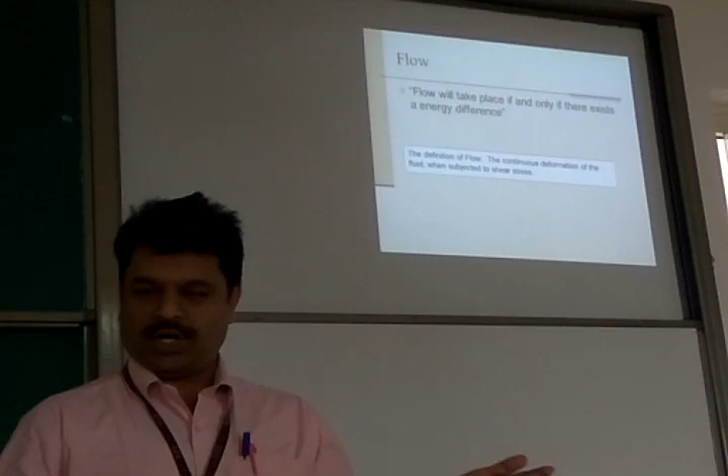Flow is a natural phenomenon. You need not force something to flow. In fact, you cannot. What you can do is create a potential difference, and flow takes place automatically. If there is a pressure difference, fluid flow takes place, whether it is air, gas, or liquid. If there is a temperature difference, heat flow takes place. If there is a voltage difference, that's a potential difference, current flow takes place. So flow is a natural phenomenon, and you don't have to do anything.

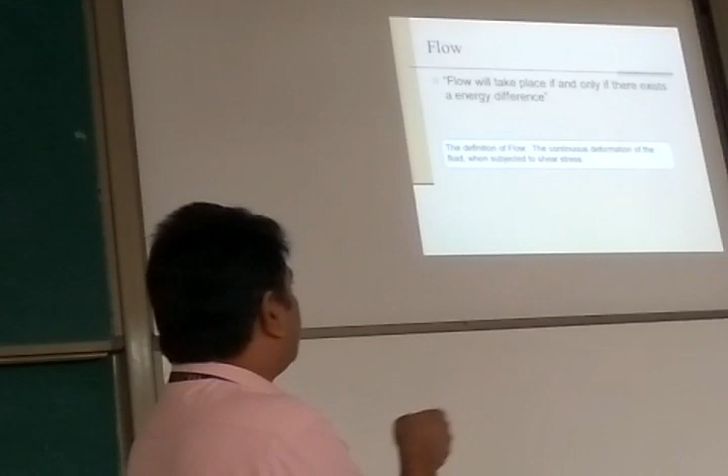From a measurement point of view, the definition of flow is: if there exists an energy difference or potential difference, flow takes place. The formal definition of flow is the continuous deformation of the fluid when subject to shear stress. Something which you apply continuously goes from one layer to another layer, in the form of layers just sliding. That we call flow.

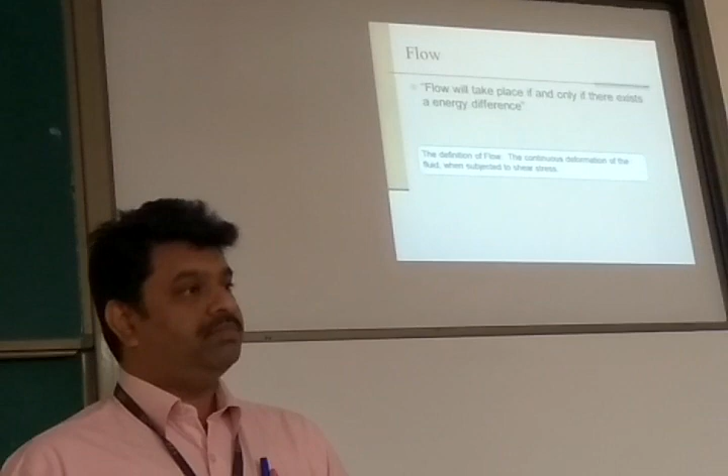Even in a pipe or channel, when water is flowing, if you use flow visualization techniques and go deeper into the analysis, you will understand one layer is sliding over the other layer. So because of shear stress, the liquid or fluid layers are simply sliding one over the other. It is a continuous deformation of the fluid when shear stress is applied. For continuous deformation, you need to apply stress - not tensile, not compressive, but shear stress. When you apply shear stress, it continuously deforms and flows. That process we technically define as flow.

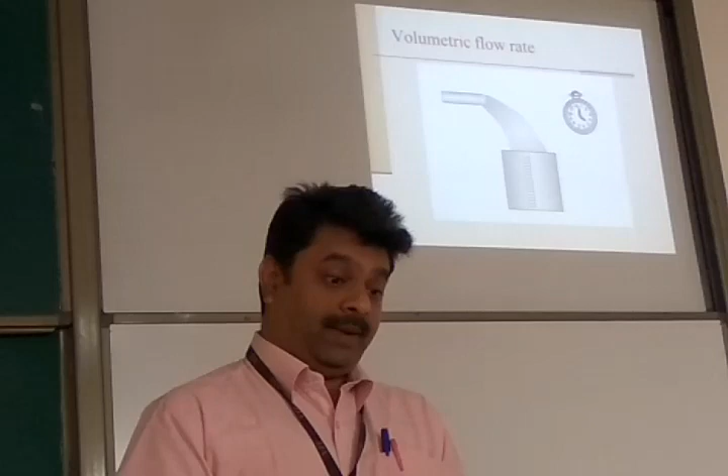Again, from a measurement point of view, the term flow is very vague. We mean many things by flow, so we have to be very specific. What characteristics of flow are we interested in? If I say I'm measuring temperature, it makes sense because I know what I'm measuring. But if I say I am measuring flow, there is confusion - what is it that you are measuring?

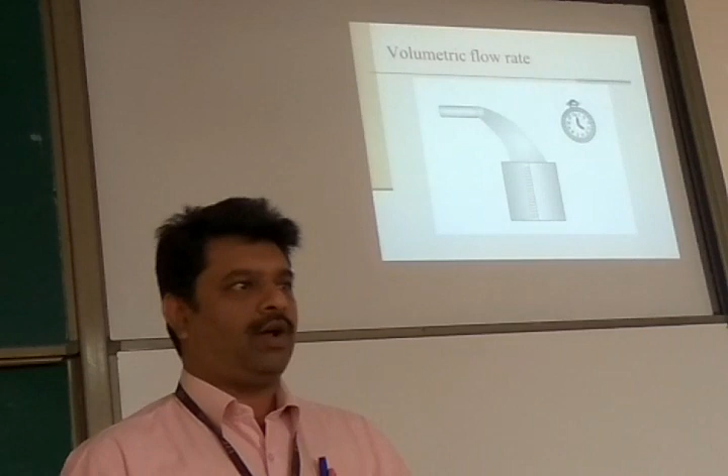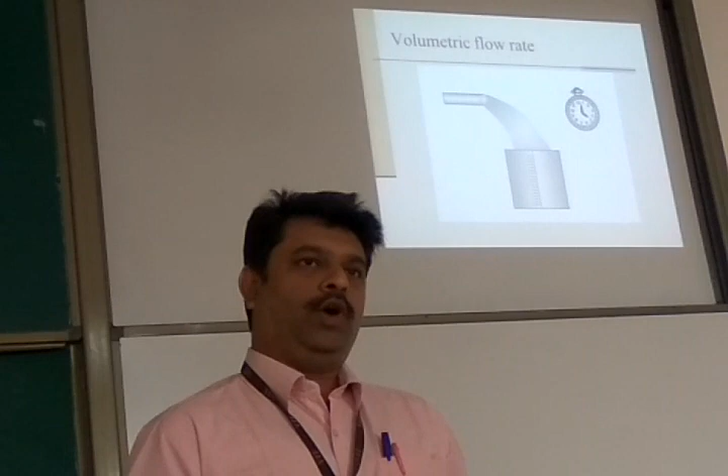There is something called volumetric flow rate, which we normally call discharge, and there is also mass flow rate. We also talk about velocity of flow. So when there is a flow phenomenon, how much liquid is flowing is one aspect, but what velocity is, is another aspect. You should always specify what exactly you are measuring when talking about flow measurement.

Volumetric flow rate is how much volume of fluid per unit time is flowing through the pipe - if you measure that, it's volumetric flow rate. Mass flow rate is how much mass of fluid is flowing in a given period of time - that is mass flow.

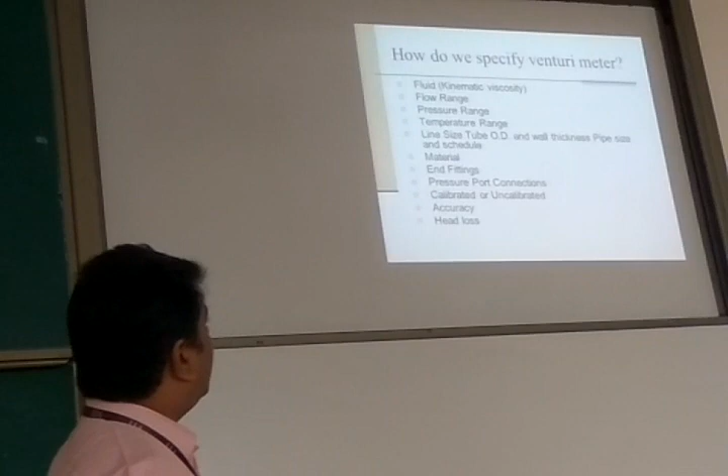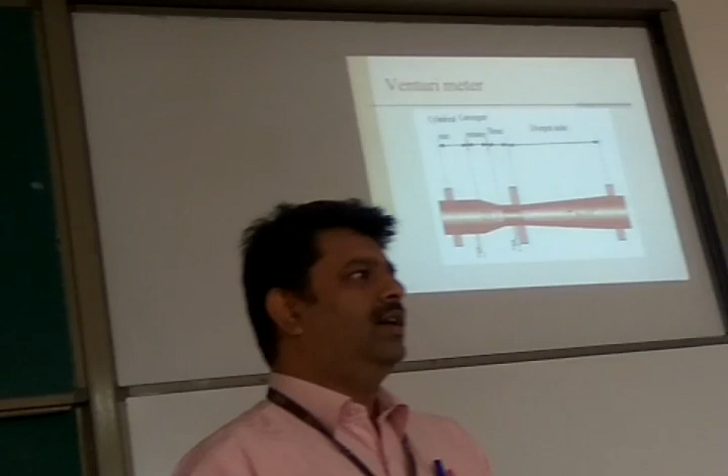And we have three devices: one is venturimeter, another is rotameter, and the third one - anemometer, not pyrometer. So these three devices are there in this semester. That's very simple, just a matter of child's play. Maybe after a weekend, it's like a warm-up class, so you don't have to stretch yourself.

You might have seen this as part of your fluid mechanics lab. Here you have a converging section, that's the entrance section, then a small throat section, and then a diverging section. About 21 degrees is the inclination here, and about 7 to 15 degrees here, varying from application to application. Our purpose is to find out the amount of fluid flowing through that particular pipe.

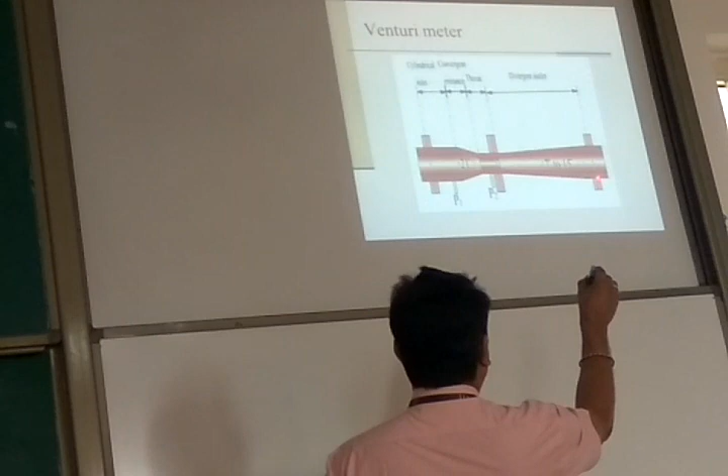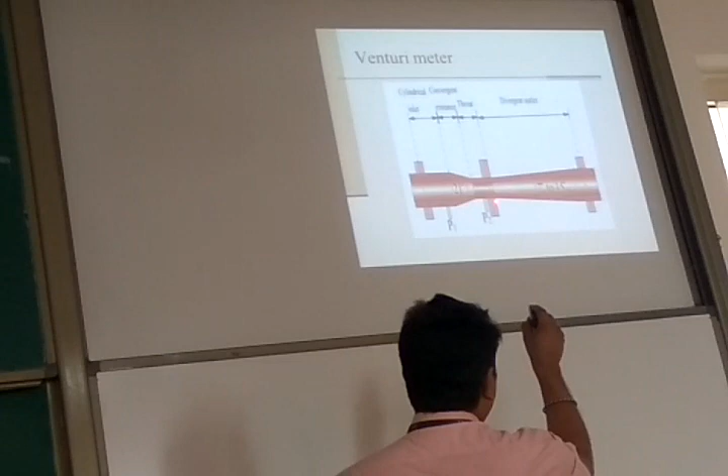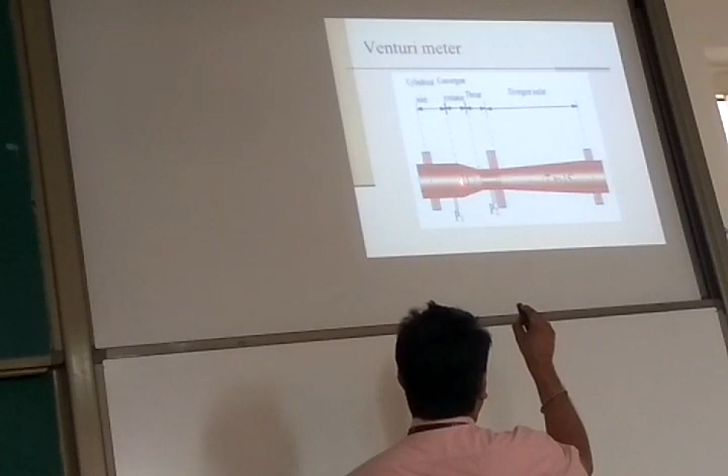So what we do is purposely introduce a pressure difference and measure it. How do we create pressure difference? There is a converging section, throat section, and diverging section - from here till here is the venturimeter, a single device. You have one pressure tapping here, that's the upstream pressure, and here in the middle is the throat. It is not downstream - downstream is generally here, but for Venturi we call it downstream in common terminology, though it's actually the throat. Exactly in the throat we take the second pressure reading, and before the section starts converging, we take the upstream pressure.

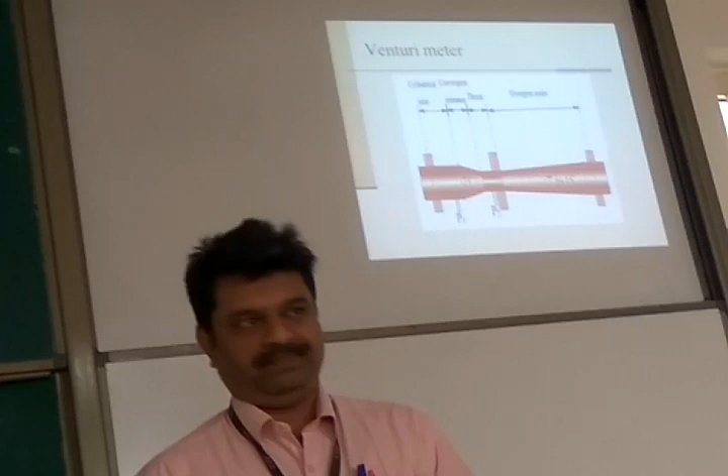When you take this pressure difference, what we wanted to do is create a pressure difference - it will be high if the flow rate is high, and low if the flow rate is low. That's the idea. So people initially started with the orifice meter. What is meant by orifice meter? You simply take a plate, put a hole in it, and that becomes an orifice.

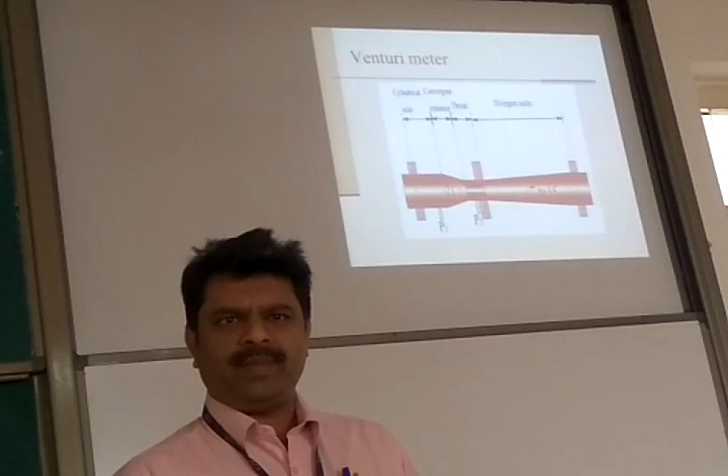Simply fit a plate in the middle of the pipe, that's orifice meter. You've heard this in fluid mechanics, right? Orifice meter, nozzle meter, Venturi meter. But you're staring at me as if hearing it for the first time. Okay, so you take a round plate, put a hole in it, that becomes an orifice meter.

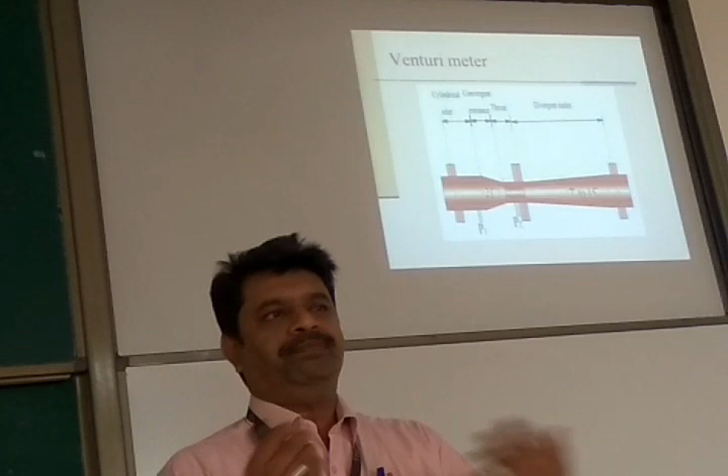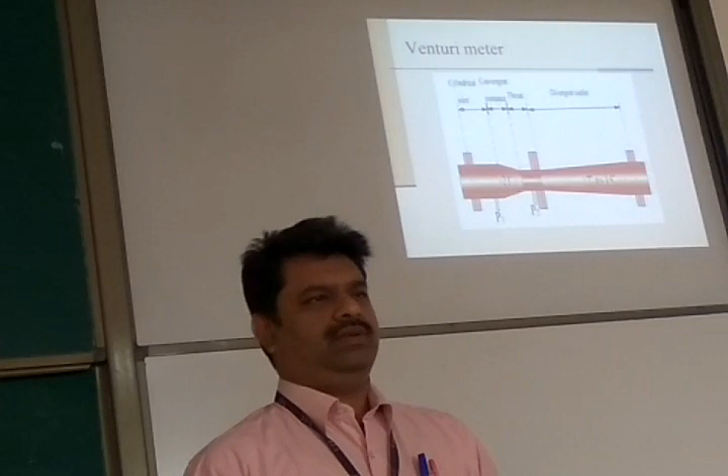Any sudden reduced cross section creates a pressure difference, and you can measure upstream and downstream pressure to calculate discharge velocity and whatever else you want. But the problem is, because of this measurement, the flow gets disturbed too much, since we reduce the cross section area for measurement purposes. What is this effect called?

Loading effect. This effect is called loading effect. Loading effect is high in case of orifice meter.

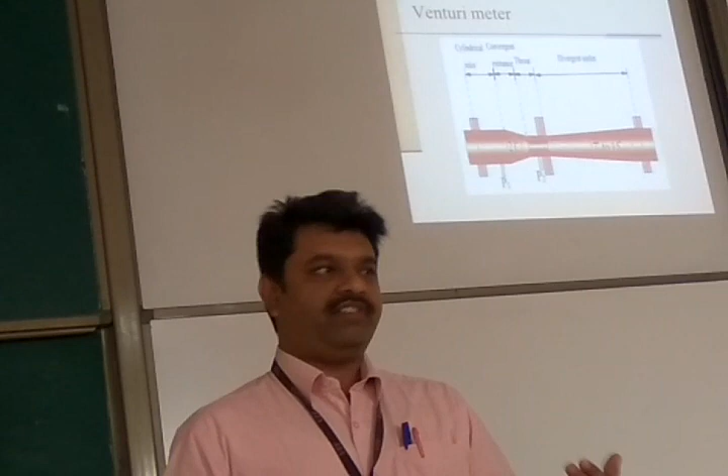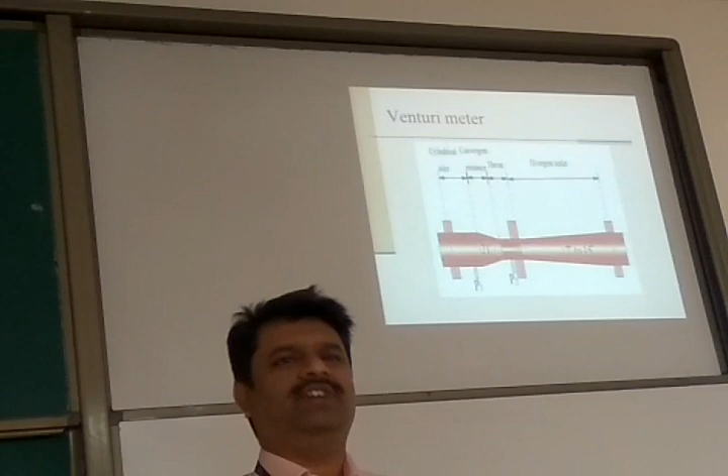Then what is nozzle meter? What does a nozzle look like? A tube that is converging, whose cross section keeps reducing to a lower value. If the cross section reduces, you call that section of the pipe a nozzle, simple.

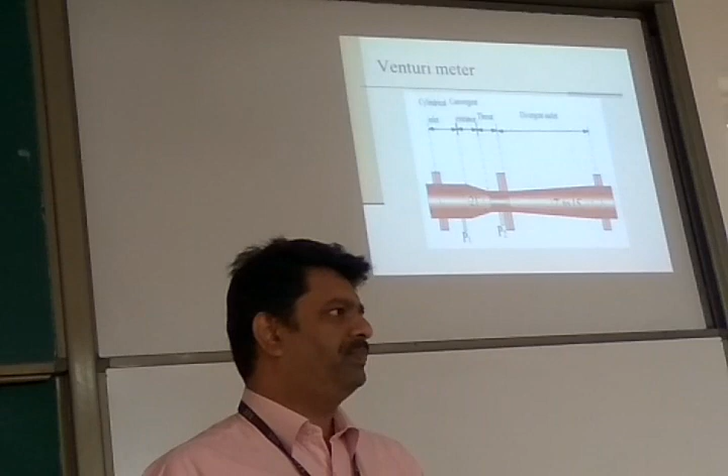People used nozzle for flow measurement because anyway you wanted to reduce the cross section. If you suddenly reduce it like an orifice meter, the pressure loss is too heavy to recover, beyond recovery. We don't want to lose pressure, especially in a fluid transport system or a fluid power system. In both, pressure is a very important phenomenon as far as fluid is concerned.

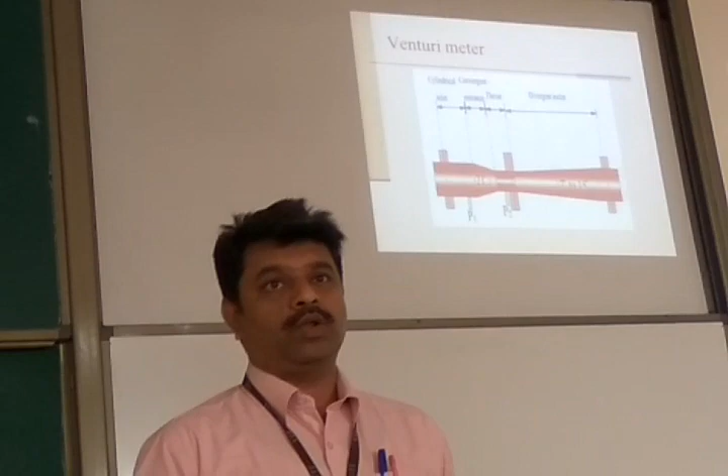In most applications we want to retain pressure because that is power directly given by the motor through the pump, so we don't want to lose it. As much as possible we would like to recover the pressure. So they said orifice meter is no good for better measurement because loading effect is very high; you can measure, but loading effect is very high. Also in fluid mechanics you might have studied the coefficient of discharge: 0.5 to 0.6 for orifice, 0.7 to 0.8 for nozzle, and 0.8 to 0.9 for Venturi. Some ranges you might have studied.

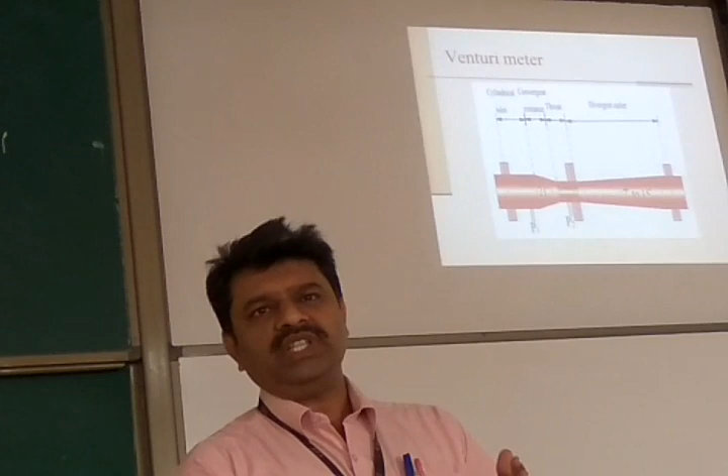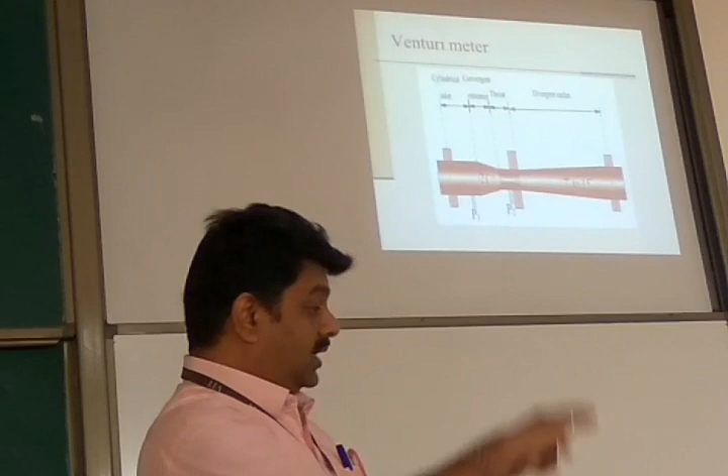That tells how much pressure you lose in the process of sudden cross section area reduction. Now, nozzle is only this portion - don't worry about the throat or the divergent section. Only up to the entrance section alone, that becomes nozzle. You connect it to another pipe, that becomes nozzle. The area is not suddenly reduced but gradually reduced, then there's a bigger cross section pipe in front.

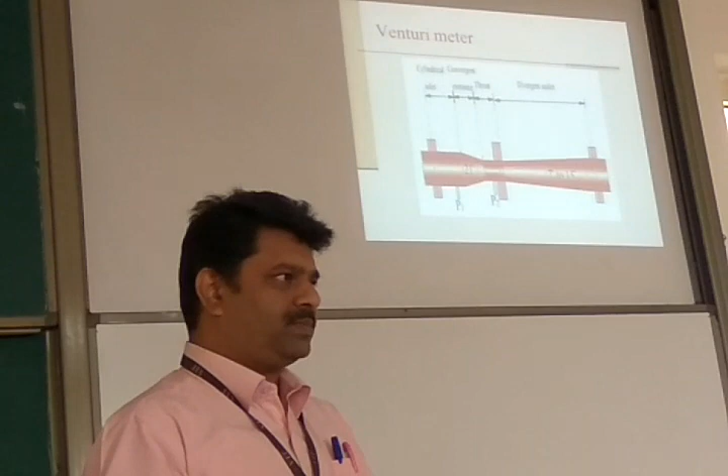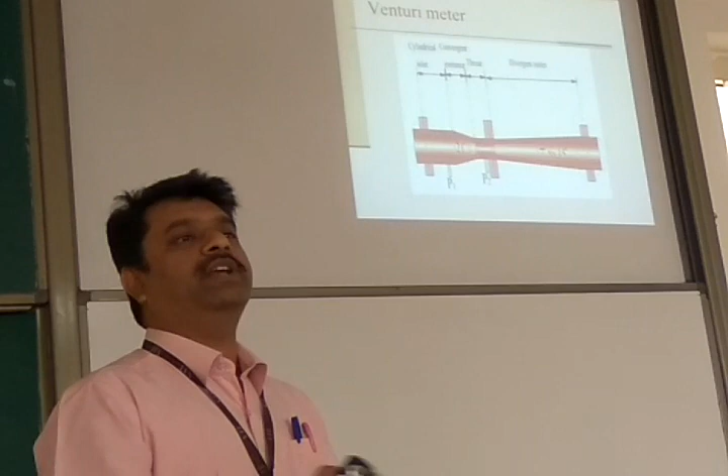So the liquid is poured in the form of a jet, and there will be reverse flow forming eddies, with a lot of pressure losses that couldn't be recovered. Even though it's better than the orifice plate, there are still a lot of pressure losses people wanted to improve on. So they reduced the cross section, and to recover pressure without much loading effect, they wanted a diverging section. Initially there was a converging section and a diverging section.

If the cross section gradually increases due to skin effect and other effects, the fluid keeps touching the outer surface and then slowly enlarges, so there's no eddy formation. The liquid fills the pipe and then goes - that's what is expected - and the pressure is recovered fully. But what happened?

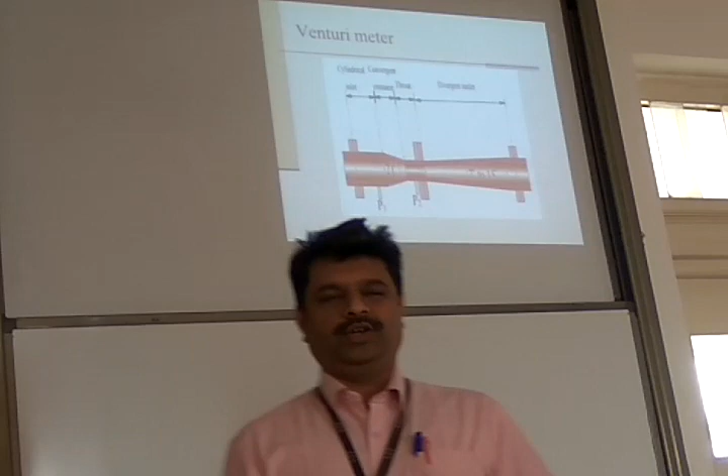Because the cross section is reduced, like a jet, the pipe comes here, and even here and here, there are a lot of eddies forming. They said the eddies are there, and eddies mean pressure loss, energy loss - unnecessary bubbles form and energy is lost. You don't want that to be lost.

So for streamlining, we reduce the cross section. We don't want that jet to form and fall. So they made a smaller cross section as a throat section - the same reduced cross section extended for some more time, then a slowly diverging section. They introduced this to avoid the jet effect. Then the throat came into the picture, so now there is no jet action.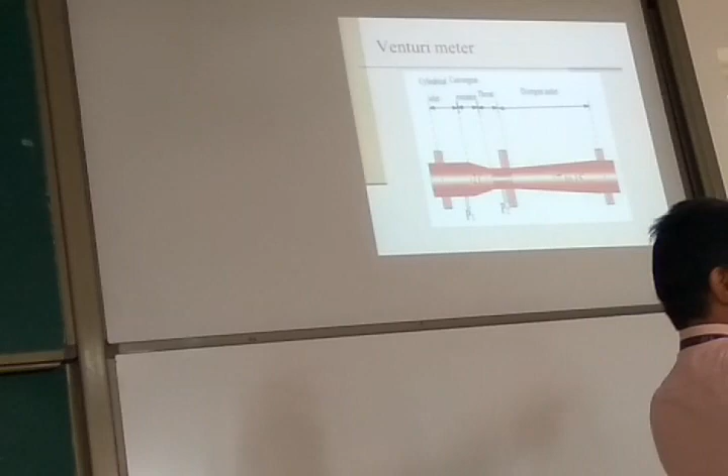That means the pipe water all comes together, goes through the throat, and then slowly diverges. So there is no jet effect in that throat section because of the introduction of the throat section.

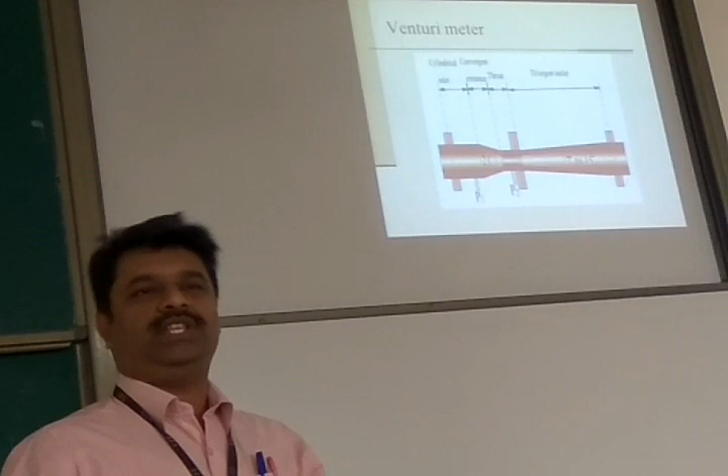The device's purpose is to develop a pressure difference by disturbing the flow, for the purpose of measurement. At the same time, we don't want to lose pressure because we are doing measurement. So our purpose is to develop a differential pressure.

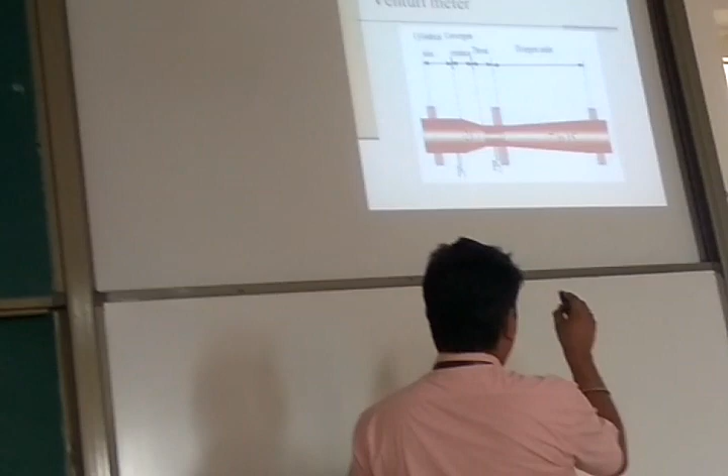Here there is a pressure with which the water or the fluid is coming. Here there is a reduced cross section, definitely there will be a change in pressure. That difference is directly proportional to flow, as we know. For that, they reduced the cross section area, but they wanted to regain the same pressure, at least 90%, 95% close to what the pressure that we had.

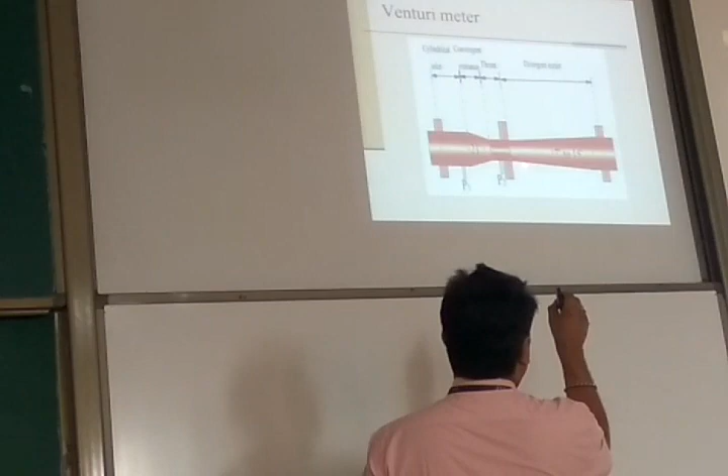So for that they introduced this throat section and a little more distance, and then there is a diverging section, and the section continues from there as a pipe. So as a device, the Venturi meter took this shape because of these reasons.

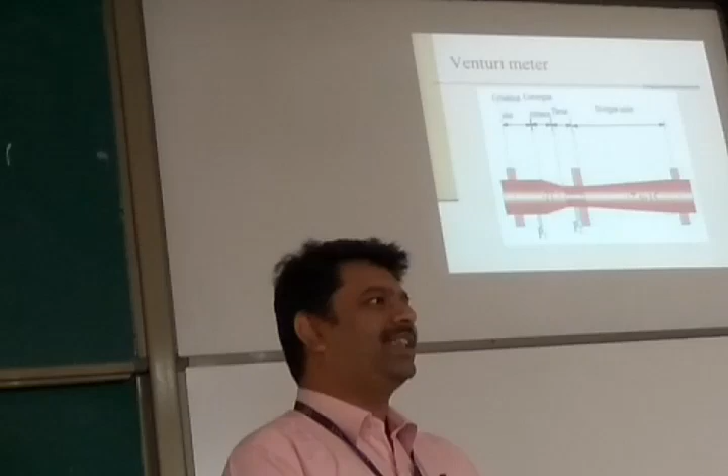Not studied? You studied this or not? Studied, right?

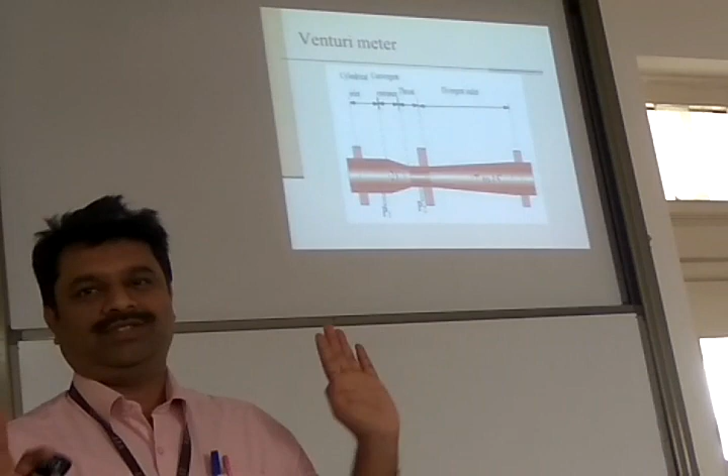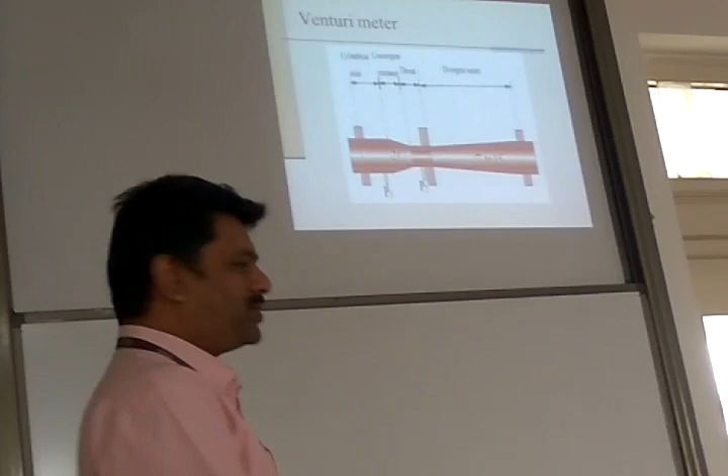Because these are all specifications. Suppose you are planning to buy a Venturi meter, these are all the items that you will ask for. So I'm not going to talk about that. This is basically the characteristics of instruments that we have discussed in the first two classes.

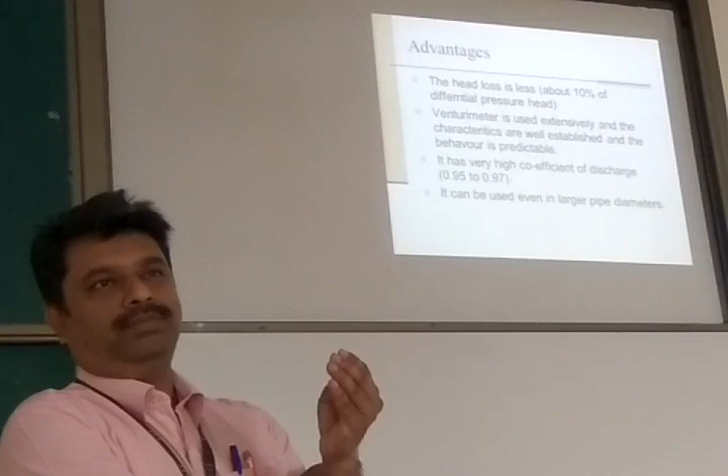The head loss is less, only about 10%. 10% is actually high, but compared to orifice meter and nozzle meter, this is less. That's why it is less. It's a very widely used flow measurement device, and the coefficient of discharge is 0.95 and above. It can be used even in very large pipes like irrigation or petroleum transportation from one country to another.

Such a big country also, how much liquid is flowing, that you will be able to understand. More space is occupied, and it's very costly because normally it is all done using casting. Or of course nowadays for smaller pipes you get plastic Venturi meters. But bigger ones are all casting, so normally it is a big cost. Any questions on Venturi meter?

Venturi? You might have learned all this, right? At least you are familiar with the device. Okay. Rotameter is another device.

You have a conical pipe, a scale, that is all, with a float. The principle involved there is when the fluid moves, the fluid flow direction is against gravity. Normally rotameters are supposed to be kept vertical only; otherwise, you have to do recalibration. It is not inclined. Rotameters are kept vertically, and there is a float. It will be like an inverted cone, and the cross section of the pipe keeps on increasing.

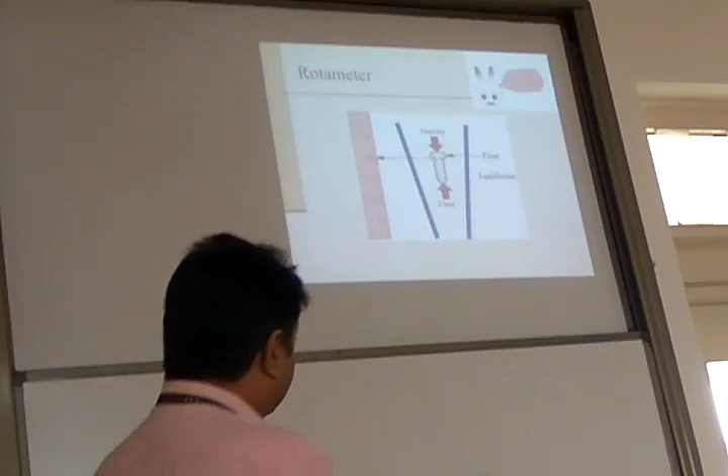That's all. So the cross section area of the pipe keeps on increasing, and the principle is when the liquid flows upward, it offers a force on the bottom of the float. So the float, on its bottom side, experiences an upward force, and there is gravity because of its own weight, which pulls the float downwards. At some place, the upward force offered by the flow and the downward force offered by gravity become equal.

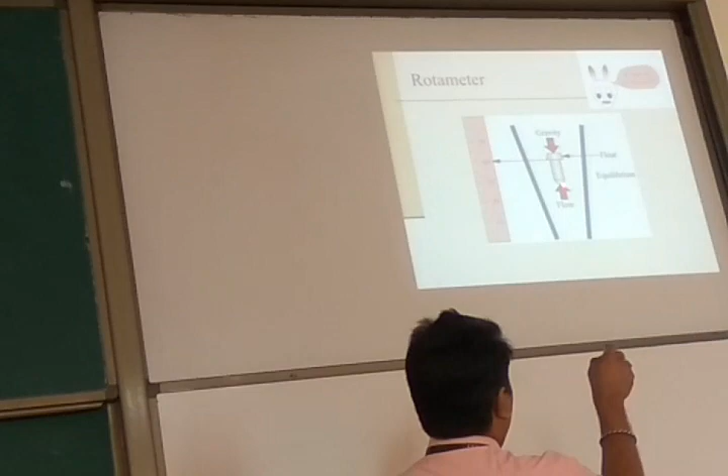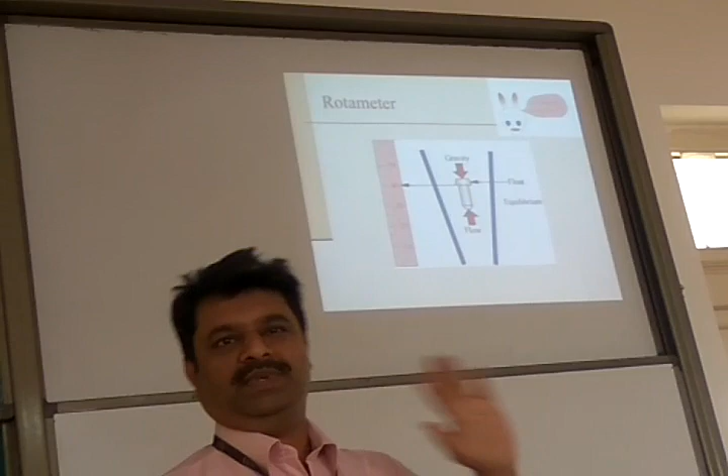If the flow rate is less, that balance point, we normally take one point, either the lowermost point, the collar point, or the topmost point, depending upon the manufacturer. But it should be according to manufacturer's specification. He will tell you whether you should take the reading from the bottom of the float or from the top portion of the float, because accordingly the scale will be fixed relative to that position. Only he knows, so he will indicate how you should take the reading.

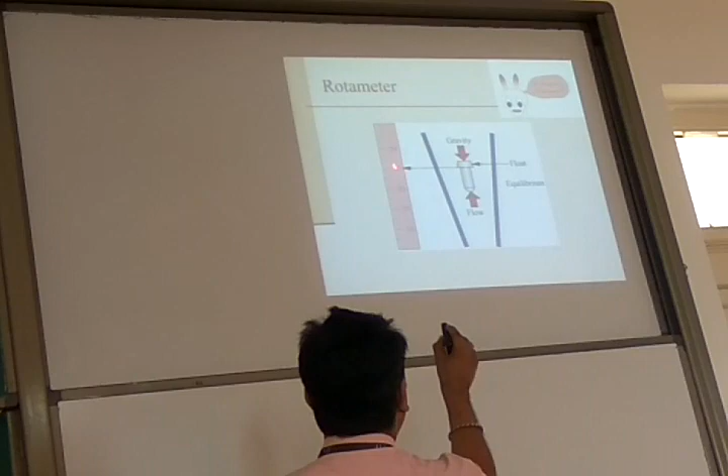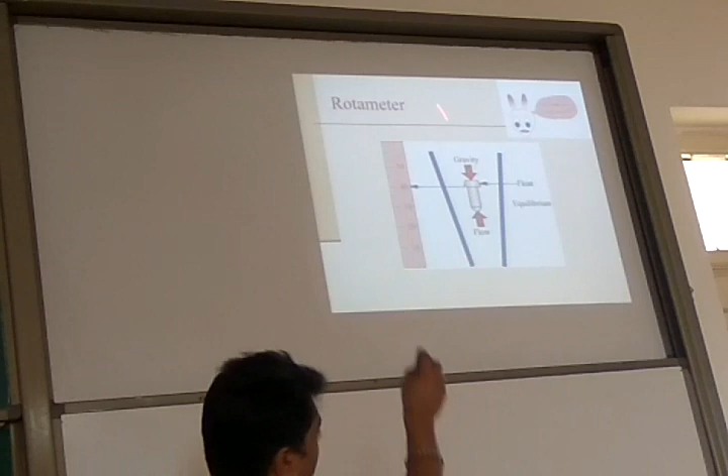I have taken this, the collar of the head, so right now we are showing some part. If the flow rate is slow, this float will come down and show a lower reading. If the flow rate is high, the balance, the equilibrium happens at a higher position. So you will be able to calibrate this height where the equilibrium takes place as proportional to the flow rate, and then directly take the reading of flow rate from the scale.

You measure what is the centimeter reading, and proportional to that, there will be a table. Refer to the table and then find out what is the discharge. This is the rotameter. Simple. There is no technology involved, nothing for this.

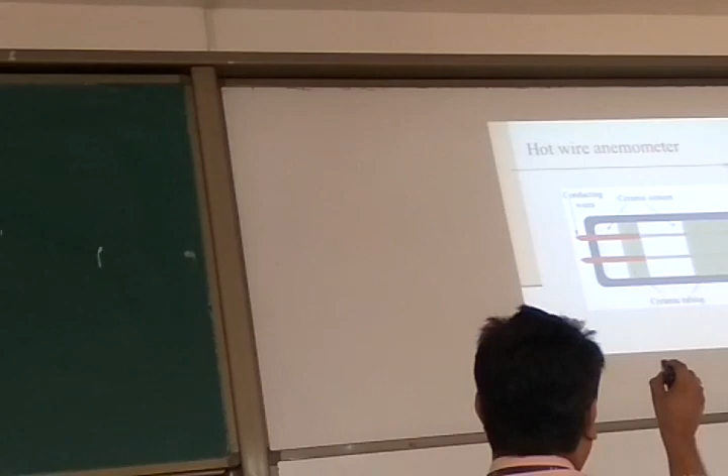You have two wires, conducting wires. Here you will have a thin wire, which you are not able to see. When current flows through a conductor, the conductor gets heated up.

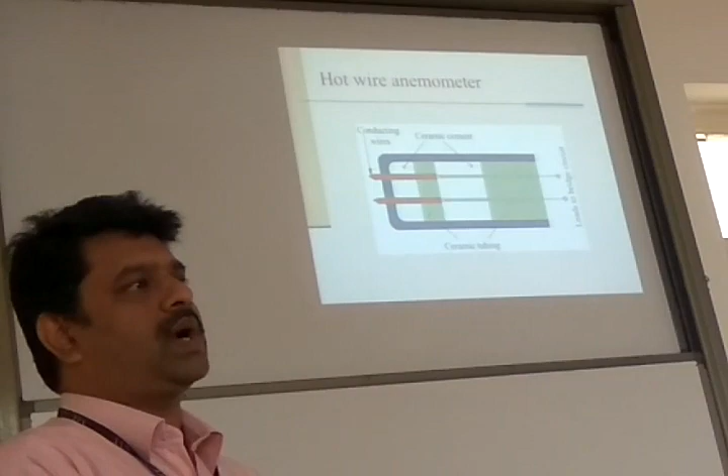You are aware of it? After some time you touch the bulb, you feel hot, isn't it? The bulb is hot because already the filament through which the current is flowing is actually becoming hot. That hotness is due to radiation, conduction or convection. It transfers to the outer bulb and that bulb becomes hot. So when current is flowing through a conductor, the conductor is becoming hot.

And that wire is between these two terminals. Of course, one terminal is here, another terminal is here, and these are all ceramic tubings and ceramic cement. Alternate layers will be there, just to separate one wire from the other. No big purpose. It gives structural rigidity, and it also separates them out.

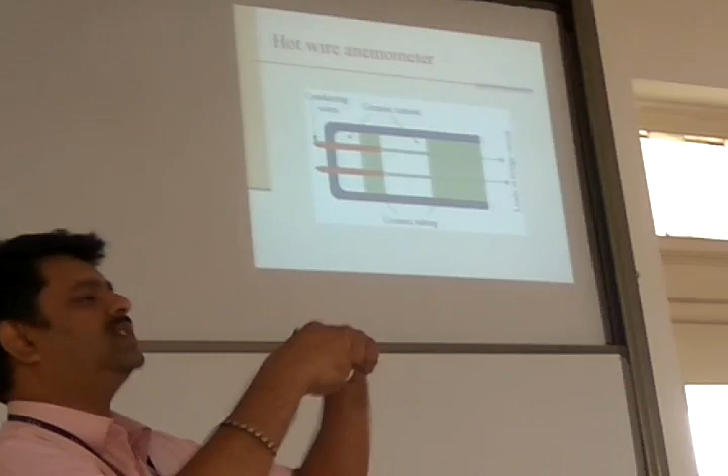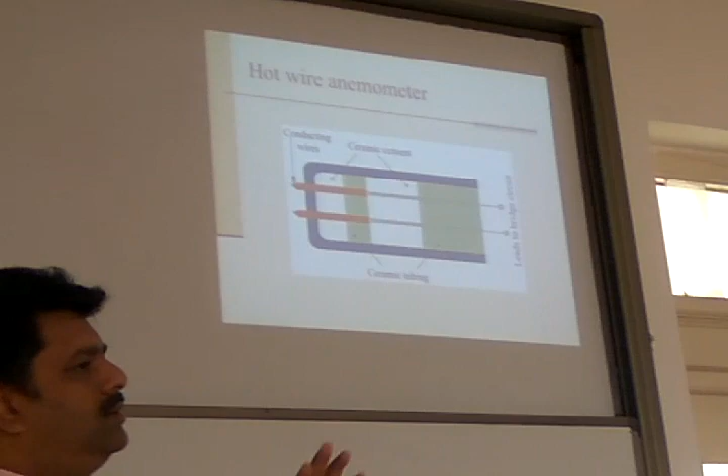Like in the high tension lines, they put one ceramic tube. Have you noticed it? One wire, one ceramic tube. They tie it to another ceramic tube, another ceramic tube. This will be connected through a metallic strip. What is the purpose? No big purpose. I don't want the first line and second line to touch due to air or wind.

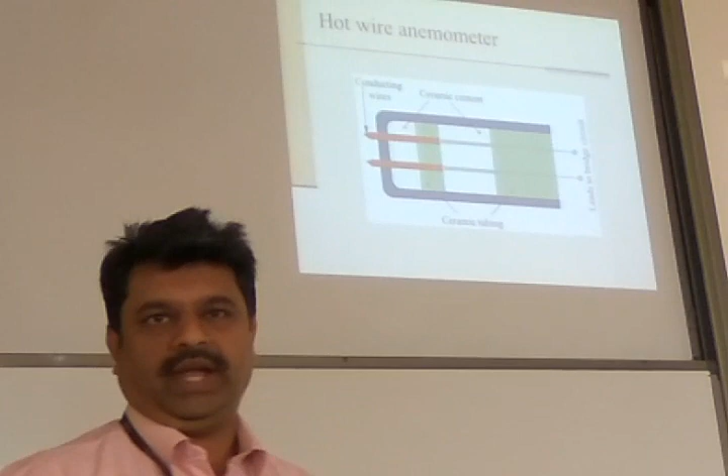I want them to be separated out. So I put one ceramic tube, and distant to that, maybe here one ceramic tube, one wire will go. Here one ceramic tube, one wire will go. Here there will be a metallic strip to separate these two wires out. Metallic strip is a conductor. We don't want to put a conductor directly there because that will conduct and short circuit. So we put a ceramic tube there.

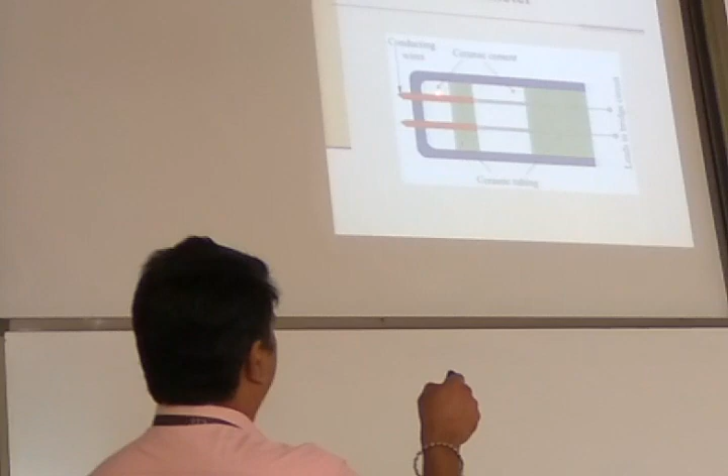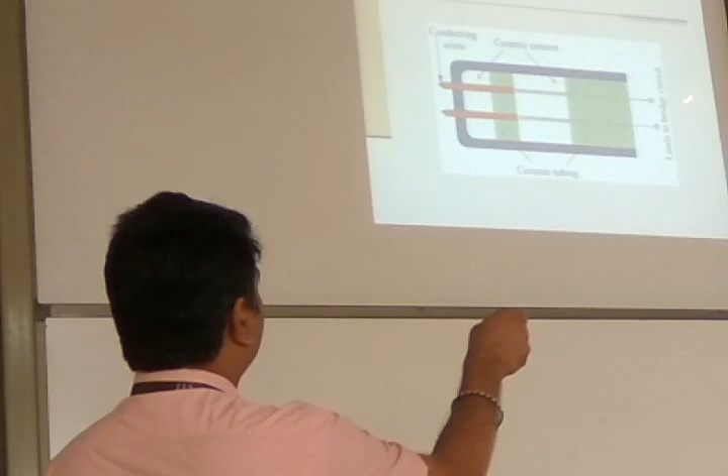They are also the same purpose. They are all white and green, or alternating ceramic tubes basically that separate two wires. That's all, otherwise no big function for that. You have two wires, and here is the hot wire. Now, how do we measure flow using this? Whatever I have shown you, I have zoomed down and made it available here.

That is actually a small element. Just for you to visualize, I have shown it as a big tube. Now it has gone to its place. Inside the pipe, we put that hot wire in. What is the working?

Now you connect those two terminals to one arm of the Wheatstone bridge. So you should have some understanding about the Wheatstone bridge, because we have discussed it enough prior to carry on. So initially, before fluid flow takes place, we switch on the Wheatstone bridge and the supply and all that.

So there is a power supply through which the current goes, and some heating takes place, and the coil reaches some particular temperature. Coil reaches a particular temperature. When temperature is high, the resistance of that material will be... when temperature is high, the resistance of the conductor is high.

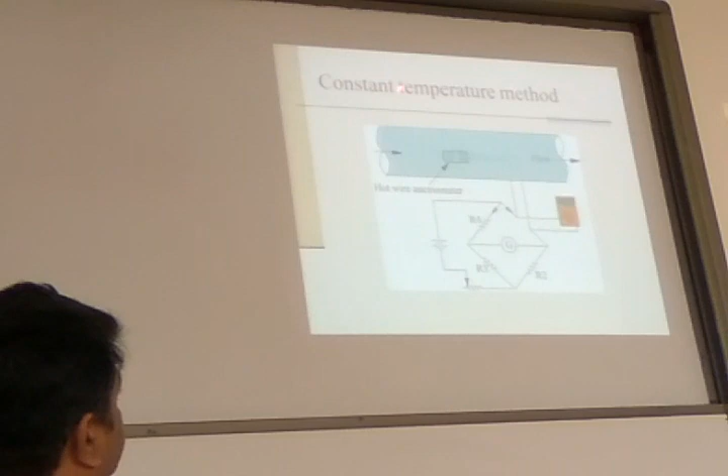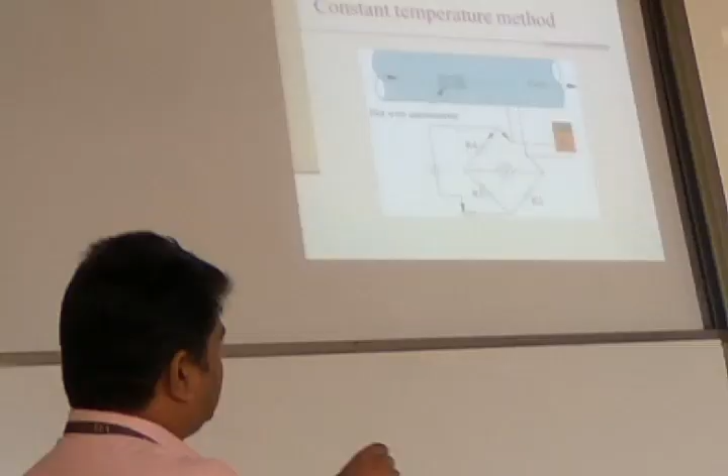I am explaining now the constant temperature method. So initially no fluid is flowing. I kept the device inside, allowed the current to flow. It got heated up to some high temperature. Accordingly, there is high temperature. Now what I do is vary any one of these resistors, or a combination of these resistors, and balance the bridge. Now the bridge is balanced. No, I'm sorry. In the constant temperature method, I will not touch the Wheatstone bridge.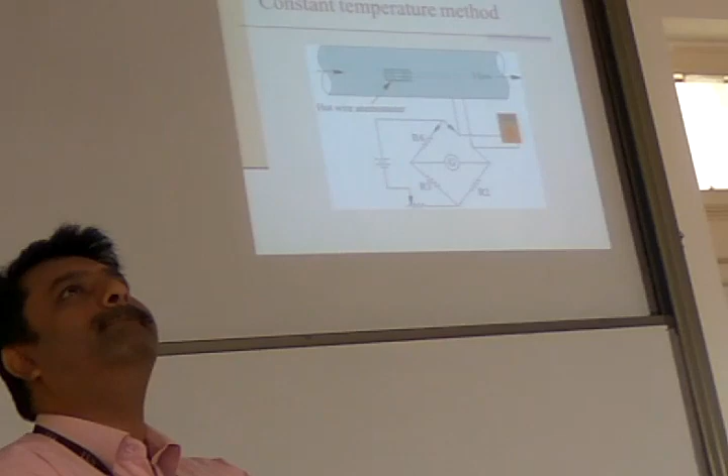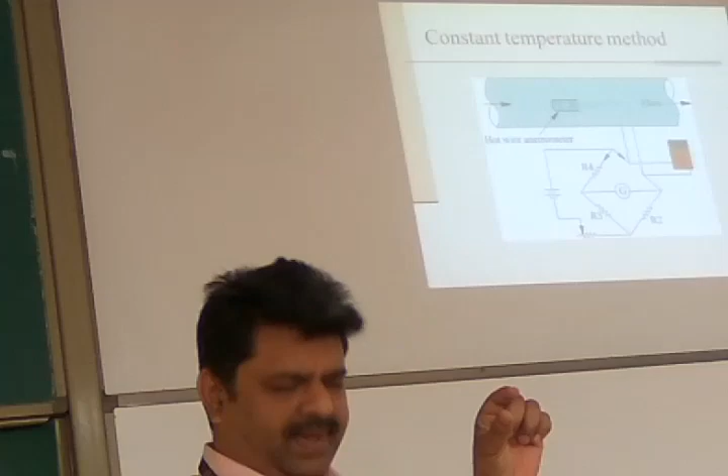Initial setting: the sensor is kept inside, it's getting heated up at a hot temperature. I balance the bridge, and that is my initial condition. So that's the initial condition.

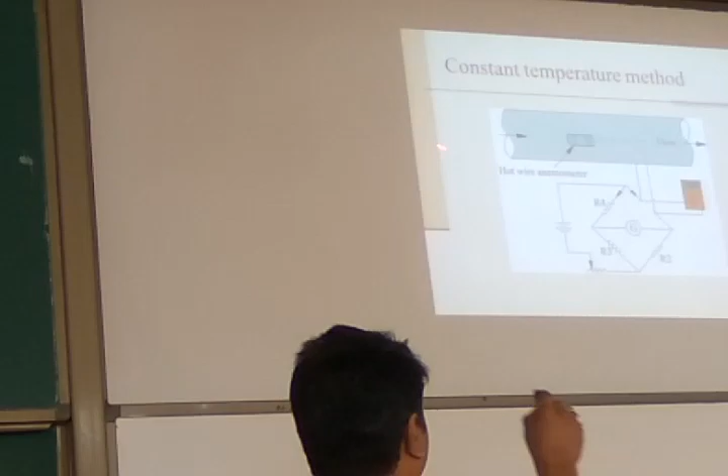Now we allow the liquid to flow. After allowing the liquid to flow, I will not disturb the bridge resistance. That is what actually I wanted to mean, but then got confused in it.

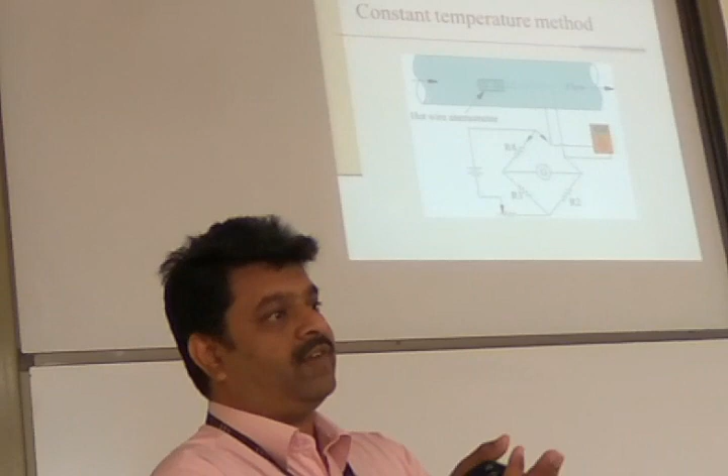So you have a Wheatstone bridge. Initial setup: wire is on, Wheatstone bridge is on, hot wire anemometer is hot. We allow sufficient time and wait for it. No liquid is flowing, so the resistance of the hot wire anemometer will be high. It reaches its saturation temperature. Then you balance the bridge. Now galvanometer reads 0. Is this clear?

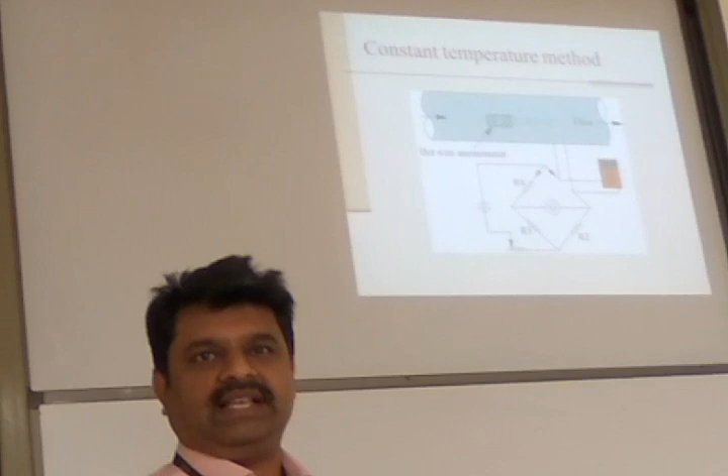Now balance the bridge, allow the liquid to flow. When allowing the liquid to flow, what happens? When liquid flows through the hot wire, the liquid carries the temperature and goes, takes heat from the hot wire and then goes. So what will happen to the temperature of the hot wire? After liquid is allowed to flow, it will decrease.

It will decrease. In constant temperature method, you wait for some time, few seconds, typically 30 to 40 seconds, or maybe 1 minute you wait. The temperature would have fallen down and resistance also would have fallen down. There will be an unbalanced voltage. Now your real test starts.

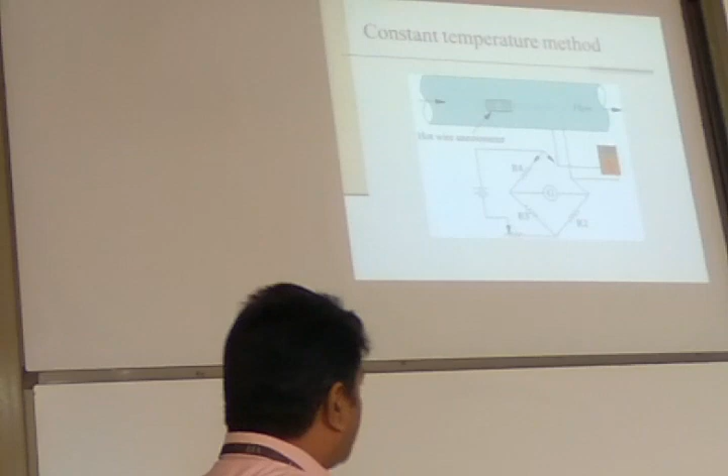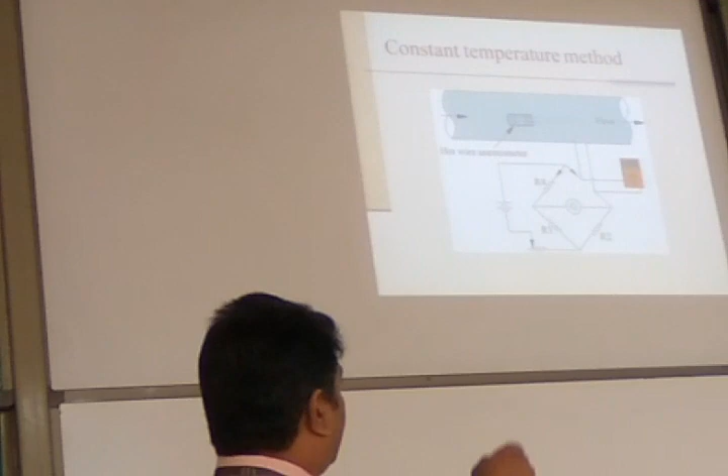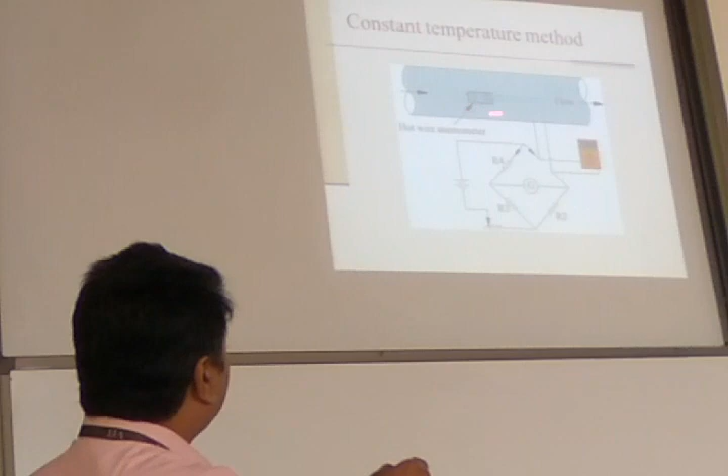Here you have a meter which tells how much resistance you are increasing. You adjust this rheostat so that you allow more current to heat up the coil again. Whatever is the wire, you increase the current. Basically, heating is coming because of I square R losses. If the current increases, the heat will increase. So you increase the current that is flowing through this conductor, and if current is increasing, temperature is increasing.

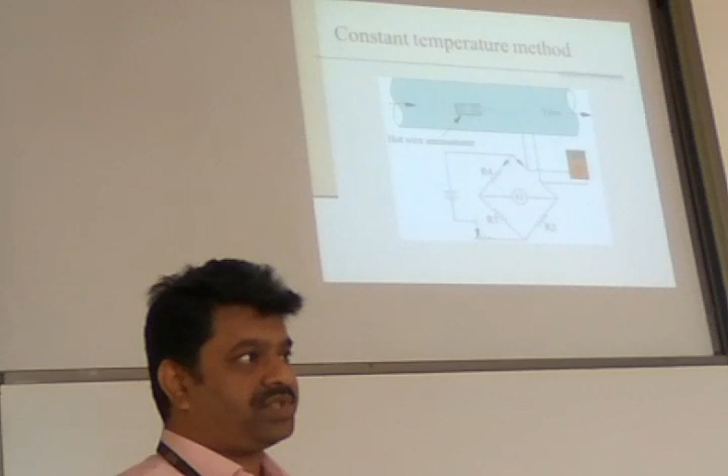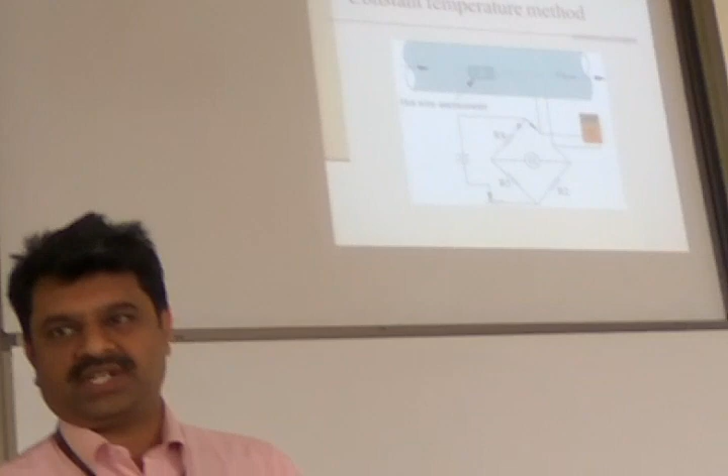Earlier, at some high temperature, the bridge was balanced. Now you bring back the bridge to balanced condition, not disturbing these three resistors, but just varying this rheostat. Allow more current and bring the bridge to balanced condition. How much resistance you have reduced is a measure of the amount of flow. If the flow is slow, discharge is less, you need only a little extra current to bring back to balanced condition. If the flow is high, you need to provide more current, more heating to bring back to the balanced condition. Our balanced condition is the high temperature level.

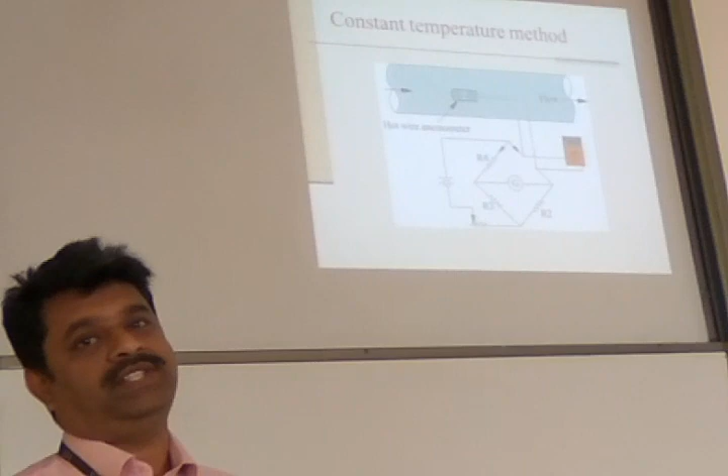Is the principle clear or any confusion? This is constant temperature method. That means reading is taken when the temperature is constant. Some high temperature we set, the same temperature we re-establish, then we take reading - that is constant temperature method.

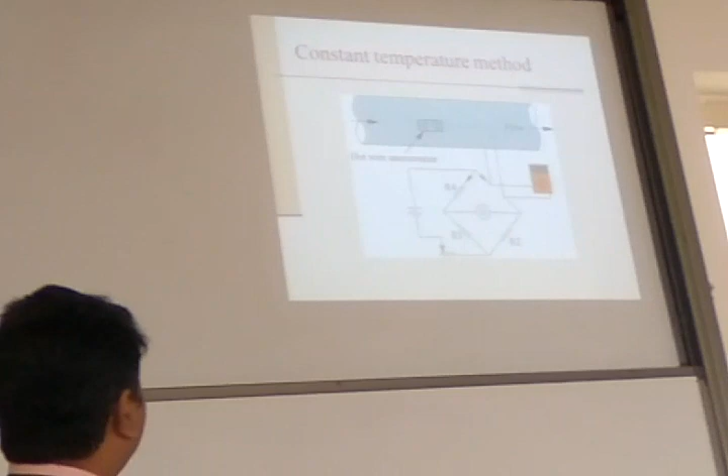Then constant current method. Constant current method is much simpler. We put this initial setting: don't allow the liquid to flow. A hot wire anemometer is inside, and you supply the current. The heat is there.

Now you balance these resistors and make it zero, allow the liquid to flow, there will be an unbalanced voltage, and proportional to that there will be a galvanometer reading. At this time, whatever reading is shown by the galvanometer, take that reading and calibrate that in terms of measurement. Normally that is how we use the Wheatstone bridge. That is the first method, a simple method.

How do we do it? We take galvanometer, do initial setting when fluid is not flowing. Bridge is balanced. Once bridge is balanced, allow the liquid to flow. Bridge will become unbalanced - meaning one resistance will vary, whether it increases or decreases. In this case, the resistance will decrease. Why? We balance the bridge at high temperature, high resistance. When fluid is flowing, the temperature reduces, resistance reduces, so there is a reduction in resistance, and you get unbalanced voltage. That unbalanced voltage is a measure of amount of flow. If the flow is less, the unbalanced voltage will be less. If discharge is more, the unbalanced voltage will be more. So this is one method, and that's another method.